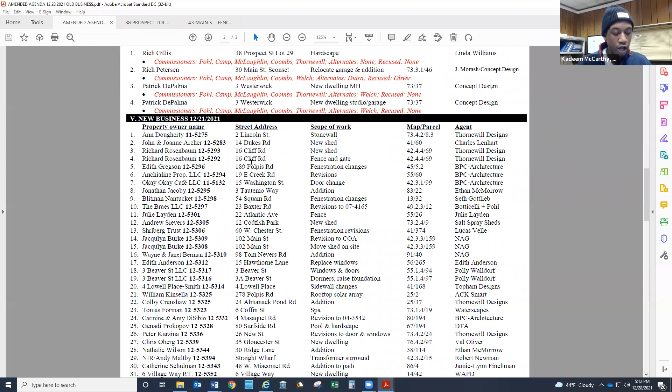Okay, all right, so good, we're going to be holding... go ahead. We're going to be holding number 18 under new business, 12-21-21. That's 3 Beaver Street, windows and doors. Did you say 18? Yeah, number 18, it's 3 Beaver Street, windows and doors.

Esmeralda, could you show us the 18 and 19, please? All right, well listen, so we're scratching the 3 Beaver Street window and door. Correct, so we're scratching that for today. That'll be back in front of us next Tuesday.

How about the dormers? Oh, we're keeping that for today. Keeping that, okay. Okay, and we'll find out where the inconsistency is shortly. Yeah, we'll find out, yep. And then on my number 34, possibly your number 33 or 35, it's 37 Fair Street, roof and fenestration. We're holding that until next Tuesday.

Okay, good, done, and that's everything that I have. Thank you very much. Okay, thanks, Kadeem. Can I have a motion to approve that amended agenda? I make the motion. So moved, that was so moved from Val.

On that motion, Diane, aye. Abby, aye. Val, on your motion, aye. And I'm in favor too. Motion carries. Anybody else joined us yet? I guess it's between holidays, so we're expecting a light turnout, I guess. Nobody else, right? I know Stephen wasn't feeling well, so my guess is he's not going to come.

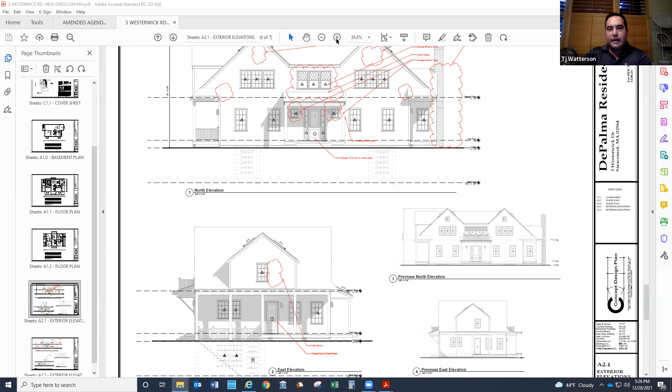On the east elevation, we've got just a fenestration revision, door color change to forest green. And then if we go to the south elevation, which is the rear elevation, we feel that the second floor will be seen, and we did reduce the fenestration on both the first floor and second floor. The previous version had doors all the way across the first floor, so we responded to that by breaking it up a bit, adding more shingle space, and going with some windows. And no changes on the final elevation. And this, by the way, just so everyone remembers, this is the Westerwick in Sconset, the one at the end of the cul-de-sac. Okay, Holly.

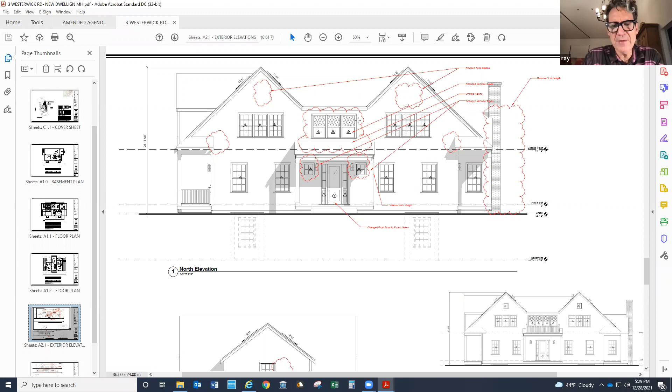Hey Abby, your first comment about the diamond windows, what was that, you know how they're now pronounced as a sort of a diamond over 1? Yes, I think that instead of 6/6, 6/1 might pull this all together, it looks kind of... You just want, totally understand it, you're not suggesting diamond pane windows everywhere, you're suggesting going to 6/1 rather than 6/6. Right, I think it's the style for this. Got it, I totally get it now.

Okay, anything else? No. Okay, thank you. Let's see, our other members on this. I've already crossed it off. Diane? Yeah, I am ready.

I'm not happy with, but agree to the number of rolled windows. I'm sorry Abby, I think the 6/6s are more fitting in this. I think the east elevation needs 2 windows separate up there, or bring the dormer way in. You got enough space up there to put a whole bunch of windows, but I'd like to see them separated, at least keep some of the windows separated in the elevations. So that's all I have.

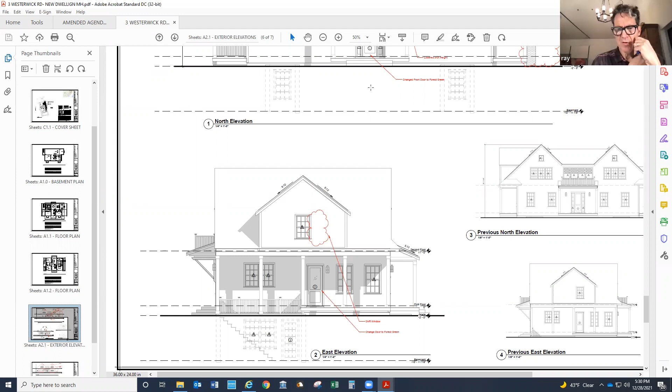Yes, east elevation, that must be the front door, it's more glass than wood, so that's... No, actually that's a side door, John. Show John the front elevation. I can't remember where it was, north. There it is, right there. It's on the north elevation. Yeah, I'm trying to read it, that's all. Two clicks will help.

Let me see, yeah, I agree, somebody mentioned 3 windows over this door with the crossbucks, that's the only thing that hampers the rest of the beauty of the building. And that's an oddball thing, she should remove them and put 6/6s to match the others.

Could I have the east elevation, please? Change the color of the door, okay, but the east elevation is still, that must be the front then, am I right? No. Oh, okay, which elevation is the front? The one you were just looking at. That's the front door.

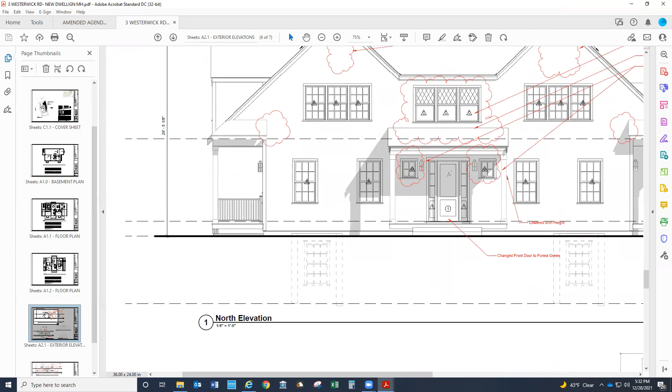Okay, so change, you got too much glass there on the door, and the other windows above it should be made 6/6 instead of 3/, get rid of those crossbucks, they're not typical to have with this house style. Could I have the north elevation, please? That is the north. He changed the front door. You lower that, change the front door. All right, that's what I'm saying. Okay, these 2 things are what I think you ought to do.

Get rid of the crossbucks and make them 6/6s. And I agree with Diane too, too much glass on the back, it's got over 50% glass there. Should we go to the back, please?

Okay, you've got straight up and down, first floor and second floor. You've got 8, 15 lite doors, I guess. Oh, they roll? I don't know. They don't roll, they can't roll. That's my comment there - they ought to change these two things. And plus, 3 doors and not 4 on the south elevation.

My comments are, TJ, why did we get rid of those gable end windows? We just got rid of those because I thought it was making the fenestration too loud, but I could always add those back. I just wanted to.

I actually agree. Without them it would result in a very large expanse of shingle, so I would like to see that. I'm okay with the diamond windows as sort of the accent piece over the front door.

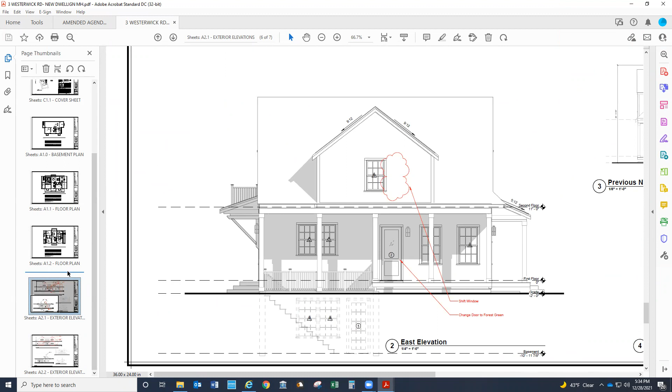Going back to that east elevation with that wide gable, I could make that two windows spaced apart. I'm not sure that two would be enough, honestly - two windows in there? It's a huge dormer. Right, it's a huge dormer, and it also appears like it's sitting right at the eave.

If we go back to the north, I'm sorry to bounce around, but yeah, it's seriously flush right up there - no setback, no nothing. Actually, what you should be doing is setting that back like a foot from the face of the column underneath it. Then maybe the two windows would work, because the dormer would feel less massive sitting right out there at the edge. Yeah, we could do that.

So folks, how would we like to handle this one? I didn't understand what you said - otherwise I'd make a motion. Okay, so if you take the north elevation, you see the dormer that's getting all the scrutiny because it's very large and has one window. You're looking at the side of it on the north elevation, on the left-hand side.

If you push that back a foot, you can just barely make out the sill, that little tiny dot next to the corner board. If you push it back a foot, you would lose a foot of space underneath the window. And then if he added one, so there was a total of two, the dormer would feel less massive and more filled out.

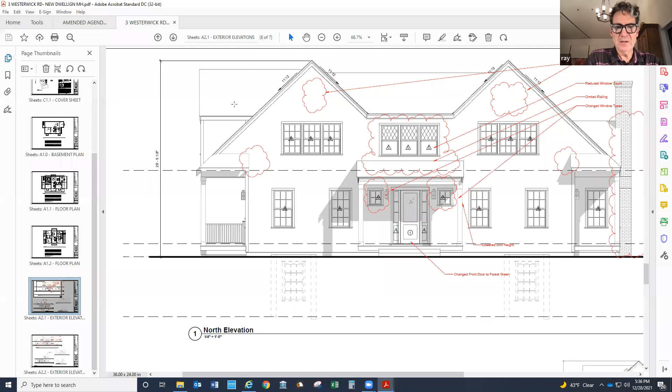But on the east elevation, even if you drop the eave 8 inches - which I think is a good point to Abby's point right now - I'd still like to see, A, two windows, and B, it pushed back a foot.

Okay, I'll make a motion. I'll make a motion to approve with the revisions - is it the east elevation? Yes. Drop the roof height 8 inches on that dormer, the eave, and set back the dormer... one foot, one foot's good, that's our rule. Okay, one foot back, from the face of the column porch underneath it on that east elevation.

Okay, everybody get that? Oh TJ, is that front door glass? I can't tell. Yes it is. Can that go to wood? Because you've got two side lights there. Yeah, that's fine. Can we add that to the motion? Absolutely, Abby? Okay, thank you.

Okay, so there's Abby's motion. Let me make sure I get the board correct. Diane, aye. John, aye. Abby - did I say add another window on that dormer? I don't think I did. I think you did actually. Okay so yes, there's a second window on the east dormer - that was part of the motion. I'm in favor. Okay, very good, and I'm in favor too, so that motion carries.

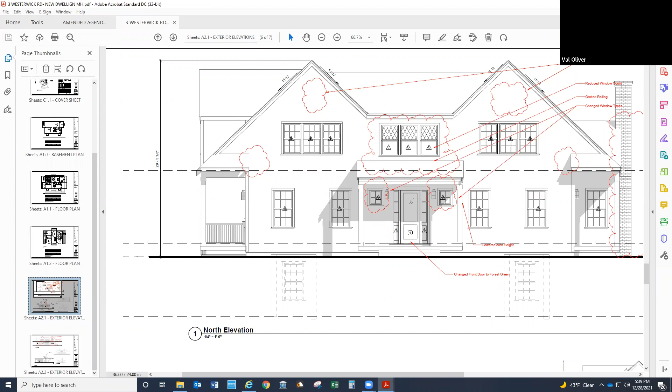I'm not on it, but who's working the screen? Yeah, I know - who's, there we go.

Okay. Did we review this? Yeah, you all have, right.

You lost the cupola, you changed the garage door, and maybe you reduced the height a little bit. Yes, we reduced the height, maybe 8 inches.

All right, Holly, Sconset Advisory. Yes, sir. They appreciate the changes with the removal of the cupola and centering the garage door. They have no further comments. Neither do I. Thank you. Okay, thank you. Who would like to begin?

The only thing I have a problem with is that east elevation with those two windows, the two ganged windows, sort of swimming in that gable. I think it should either be just one and centered up in that gable, maybe smaller, I don't know, but it doesn't look rightly placed. Is that the window pattern odd? Is it going up a stair or something? Yeah, the one on the left is going up a stair. I don't mind that so much, but the ganged one at the top is disconcerting. Other than that, I think they're good changes.

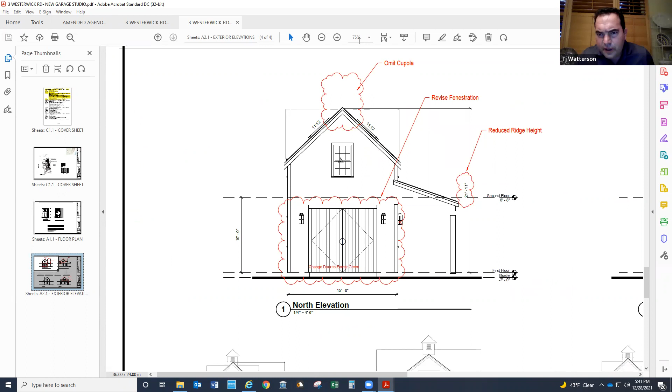Thank you, Abby. Diane? I agree with that window comment. The slab didn't have much change. I was wondering, TJ, what's the height of this building? This one's 21 foot, 11 inches. Okay, that is good.

My original thing was to widen the elevation. I don't know which one it is, all I'm seeing is the little one down the corner. We ran into ground cover issues on adding any more square footage on this, so we couldn't get it wider. It's the left one, bottom left one. But if you've got those problems, I'll go along with what's there, okay.

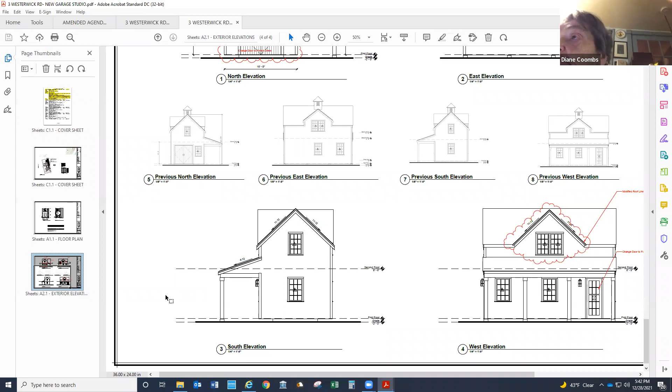Okay, John? West elevation, please. Yeah, you've got to change that door, get rid of that 15-light door and put in a regular house door, a 6-panel or solid core panel, but something, not these. That's the front door of this cottage, it's not typical. I think that ought to be changed.

That's it? No, that's all I got. I still think it's too tall. How tall is it? It looks very vertical. It meets the 1.5 to 1 requirement. It's 21.

Can you change the door and the windows? Oh yeah. How about a 2-panel door there, like the front door of the house? I'm sure John would be fine with that. How about you separate those two windows on the west elevation? Sure. Okay, somebody want to make a motion?

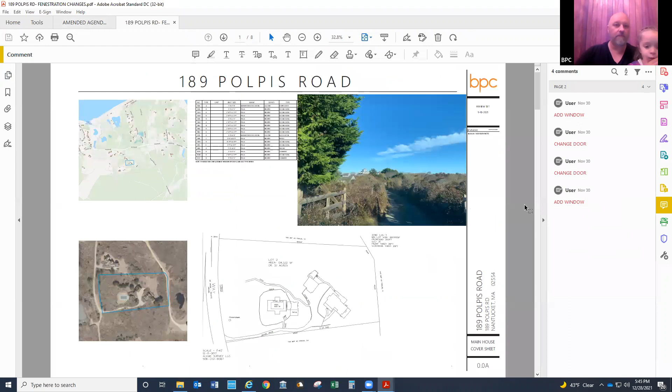Motion carries. Okay, now Joe, are you here for 189 Polpis? Yes. Okay, so you want to go? Yeah, in fact, can you go back to the site plan?

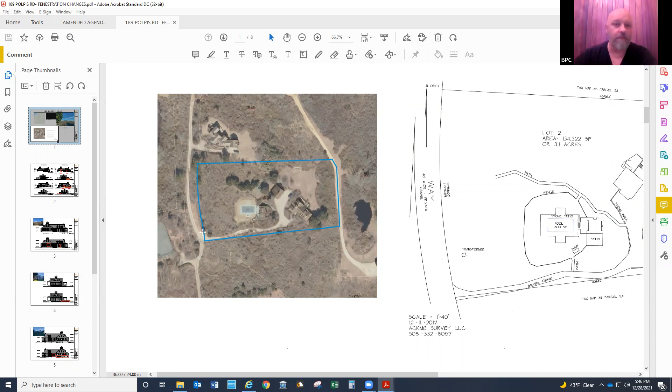This home, we're making some fenestration changes to, and the photograph on the upper right is the visibility from the street. You can see the cupola, but you can't see anything on the ground floor, and this is taken when the vegetation has lost its leaves. The bottom left part of the page shows the site plan. The public road is to the left; the road on the right side of the page is actually a driveway to the neighbor's property. So there's a lack of visibility, not that we're doing anything that needed it, but the next page shows a comparison of the before and after elevations. We are modifying the front door.

Sorry, my daughter's here tonight.

And we are adding a window in between the other windows and a couple fenestrations on the back of the house, but everything in keeping with what's there, and none of it's visible.

So really, those two elevations are the only two you're making any changes to. Correct. Everybody see that on the south elevation, upper right-hand corner? He's changing the door, and adding a window between two approved windows. And then on the north elevation, he's adding a couple of doors under the pergola and a window between the two existing windows.

Where's our house? I'm okay with it. Okay, good. You want to start, Abby? Yep, I'm happy. Okay, so you're good with all that? Little girl drafted this up. I think so, she's going to learn soon. All right, good, good. My kids shunned our business.

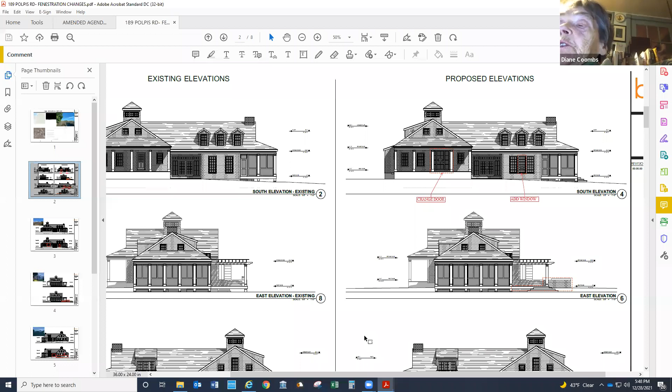I would prefer not to see three windows on the north elevation on the right-hand side. I think it's too heavy. The two windows he had before were good. Same on the south elevation, putting in the three windows - I think the two windows were better. There's a lot of windows out there already. I just think the mulled windows make it heavier.

I think that's all he's changing. Yeah, you can't see any of it. Well, if you can't see any of it, then I'll go with what you got. The proof of that is in the photograph - go back to the photograph on the first sheet, there's your building. Hard to see. You can see the roof, but you can't see anything on the first floor. Yep, so forget it, what I said.

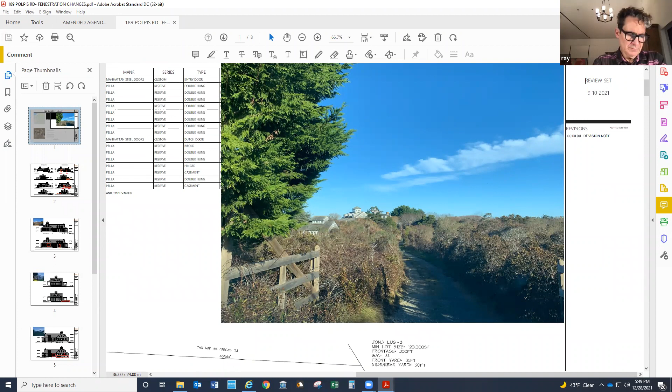Thank you, Val. Based on visibility, I have no concerns. Okay, thank you John. My question is the cupola, that's existing?

Yep, you just saw it in the photo. I would never draw a cupola, never - prior approval, right? Why are there 9/9s and 6/6s and 6-light windows? Why is there a mixture, a conglomeration of all windows, with no familiarity to it? And also on the east elevation - those are all existing, John. I'm just matching what's there, really. I don't necessarily disagree with you, but they're all existing. Okay, no comment, thank you.

I think we have liftoff, guys. Motion to approve is submitted. Thank you, Val. On that motion: Diane, aye. Abby, aye. John, aye. Val, on your motion, aye. And I'm in favor, motion carries. Okay, 19 East Creek, thank you.

I think all of mine will be easy tonight. I thought this one should be consent. Praise Jesus, he's taking off a pergola. I would motion to approve it now. Yeah, seriously? Yeah, well you know what...

This is really just cleanup because it went through Concom and got approved, and Concom asked us to remove the pergola, excuse me, and a couple of warts we had added to the rear of the building to accommodate some mechanical space. You're removing all that because they didn't want any additional ground cover.

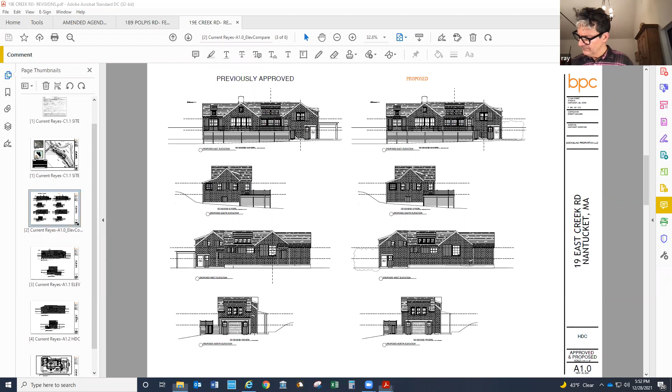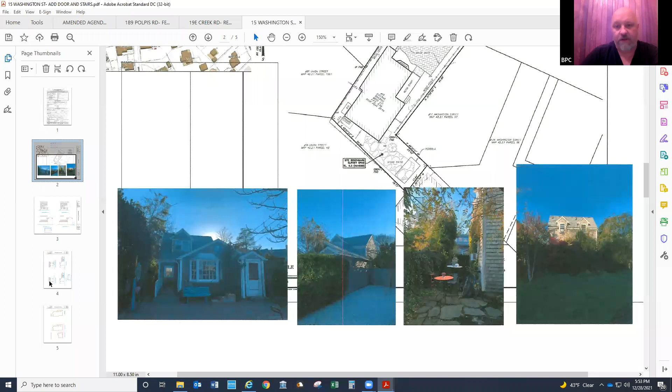Okay, third one is 15 Washington Street. Yeah, it's the Handlebar Cafe. My client just wants to add a door to the rear of the building. If you go back to that first page - these are the four elevations of the Handlebar. The bottom right is the rear of the building taken from the yard at 10 Union Street. My client happens to own both 10 Union and the Handlebar, so that's why I took it from their property, otherwise you'd be looking at this from Union Street down across. And you can see with the site plan, there isn't a lot of room behind the building.

Currently the employees of the cafe come out the side door where the ramp is, walk around the building, and they access some storage there.

So what we're looking to do, and it's represented on the elevations on the next page, there's no changes to the front. If you turn your head, there you go.

Existing elevation is on the left and the proposed is on the right. The door that we're proposing just happens to match the door that's on the east elevation. And we show a friendship stair there, not to make it appear formal, but it just gives you access to either side of the yard if you're coming up from. This is all on the back of the building.

Right next to the hedge. There's actually a 6-foot fence with a hedge in front of it, so you're not going to see any of it.

Let's hear what Holly has to say. Hi, Mr. Chair. HSAB did not take a look at this.

I believe this is a circa 1962 on the NHL within the Old Historic District. And from staff's perspective, as we've all noticed, these are not going to be visible from the public way. But also, that type of friendship stair is obviously an element within our Old Historic District and not out of character with that type of elevation.

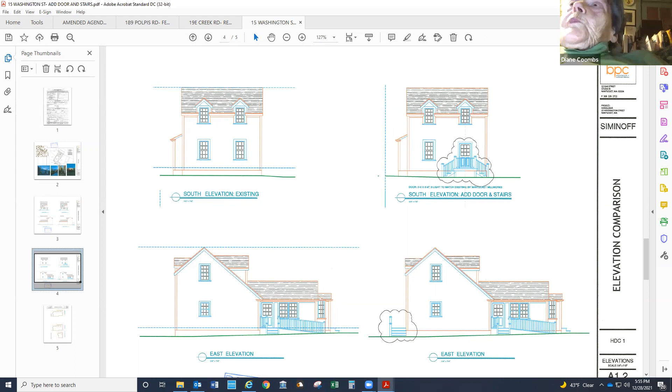I might see you later. All right, perhaps. Where are you? Number 25. Oh yeah, I think. See you down there, stay tuned. We might just get the way we're going, at the rate we're going.

Okay, is anybody here? Is Ethan here? Ethan McMorrow, that would be. Am I hearing? No, Ethan?

I don't see him. Okay, how about, now the last time we had a Squam Road, I don't think Seth represented it, somebody else was trying to get on and we ended the meeting because he called me after, like, what just happened? Wait, so is he on now?

I don't know. Yes, I'm here. Good evening. Yeah, I just saw him. Hello, can you hear me? Oh, this is Seth? Seth Gottlieb, yes. Good evening, Mr. Chair. Hey, hold on one second.

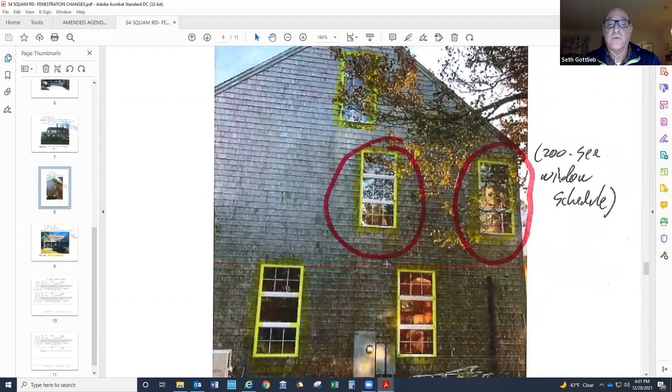Is that it? Well, that's on this side, there's more on those as well. So those that are circled in red are going to be replaced with double hung, the others are going to stay in place. Now, you really can't see this side from the road. The three windows that we're not replacing, we are still going to add trim around them.

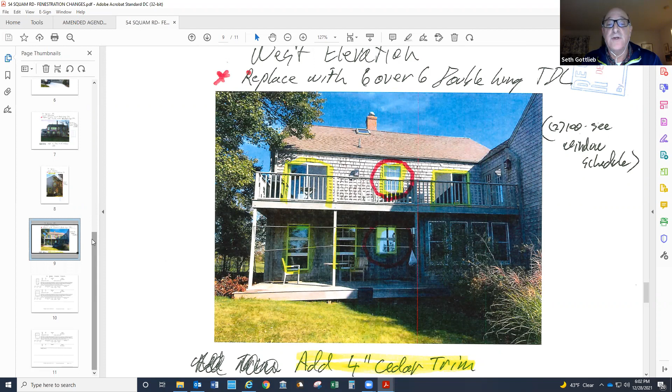Next elevation. Next page. Okay, so that's the back facing the rear of the property, which you don't see at all. Those two windows circled in red are going to be replaced with double hungs, those are going to be 6/6s. And then we are going to be adding trim around those new windows, along with trim around the sliding doors on the second floor, off the second floor deck, and the two windows on the left below. Those four windows on the right, we're not touching, at least not at this time, not with this application.

And I believe that's everything. All right, what do you think, Mr. Chair? I just wanted to give you all the vintage, circa 1970 per the NHL data on the structure.

Okay, thanks. Who wants to start? I will. Motion to approve. Well, since Seth did such a good job presenting, so thoroughly, I think we should deliberate a bit more, but I will take the motion. Can I add one more comment before we go, please? Can I add one more comment, just to make it absolutely clear?

The windows themselves are double pane, with the grills, with the spacers in the grills. At Shepley they refer to them as true divided light, so I don't know if Seth uses that same language. Mr. Chair, there's a motion on the board. Yeah, but I think I just want to make it clear, this is not in the old historic district. I appreciate your saying that, but these windows we're looking at right now are like Andersen windows with snap-in grills. So thanks for telling us that, but there is a motion on the table.

Thank you. Okay, so Val has made a motion to approve. On that motion, Diane. Mr. Chairman, I have not spoken. Yeah, nobody has, because there's a motion to approve this, John.

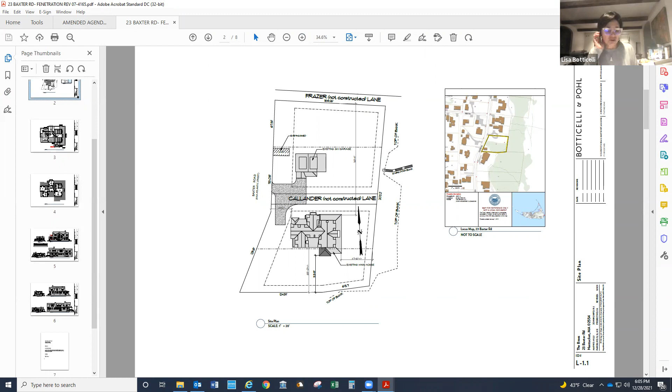Hi guys. Hey Lisa. Hi. This is an application for this house in Sconset where we have approval to enlarge the office. We previously only had 1 window on the east elevation, but we got 2 approved on the west elevation, and the client would like us to do 2 windows on both elevations.

What is all that rattling? Oh sorry, that's me going through my small pieces. So you see the 2 windows there, we do have approval on the west for 2 windows that face the road.

There, so we're just matching them on the opposite side. Very nice. What about Holly? Mr. Chair, Sconset had no concerns on this application, on this contributing structure. Wonderful.

Okay, on the renovation here. Val, I'm fine with these changes. I would motion to approve, but let everybody say something. John: yes, I'd like to see - is this for new construction? No, it's just a change of the windows, John. Oh, there they are, okay.

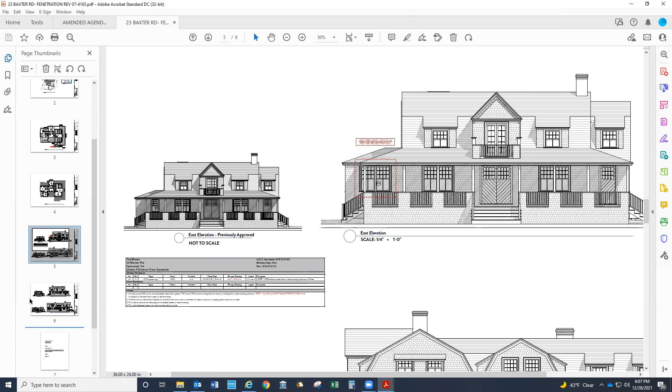Well, it's changing one window to a double? Changing that window from a single to a double. All right, go to the east elevation - we have the west elevation already approved as a double.

All right, I just wanted to know that this is this, okay. All right, thank you, I'll pass on it. Thank you, John. Diane, aye. So Val, you didn't make that a formal motion - yes. Thank you very much. Diane, on that motion, aye. And John, all right, and myself, aye. So thank you, Val, thank you very much.

Okay, thanks, Mr. Chair. Yes. Ethan is back, he just texted me. Oh, okay, let's jump back to that for a second.

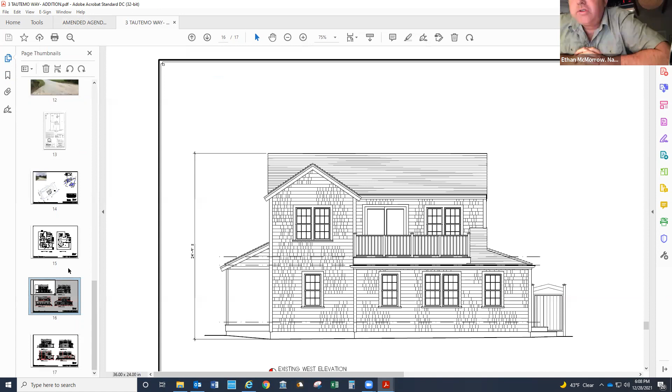Go, Ethan. So that's the house right there. Can you hear me? Yep. It's an upside down house, and they want to make the front a little bit more attractive. So what they're doing is wrapping the existing front porch, and then below they want to wrap the porch around it and add an addition, because the second floor is actually quite small and they want to make it a little bit bigger and wrap the porch.

And basically when you wrap the porch, it hides that deck that's sticking out on the front. If you look at the existing west elevation, wrapping the porch around the house also helps hide that second floor deck to make it more subtle. When you look at the photograph, that's the street view - the house is built backwards, so the front door's in the back of the house. So they want to wrap the porch and kind of soften that look.

Is that it? Well, it also has a new foundation, because right now it's on half crawl space, half a really small basement, and they want to build a proper basement. That's it, and all the other changes are the additions.

Anybody care to begin on this? I wanted to - go ahead, Val. It's funky, but I think it's in keeping with the area and with the house, so I think it's acceptable. Okay, thank you. Abby? Yeah, I was just looking at that west elevation again, where we see the little pop-up balustrade.

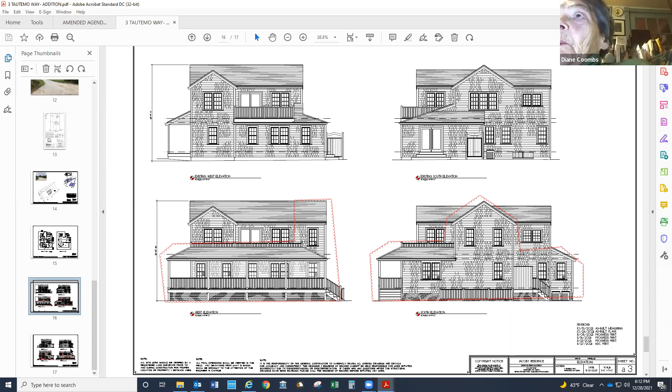I agree with what has been said. I don't mind the porch on the second floor, I think it will fit in there. So it's not very visible, right, Ethan, on Tautemo? Yeah, if you scroll and look at the photograph, scroll up, you can see that's right from the street. The whole house is cedar colored too. So no, I think that will be good. Thank you, okay, sounds like we can motion.

Motion to approve. All right, thanks, Val. On the motion, Abby? I think it's... I'm a nay. Thank you. Okay, Diane? I'm a yay. Okay, John? Aye. Val, on your motion? Aye. And I'm in favor, so that motion carries 4 in favor, 1 opposed.

Thank you. Now I believe we're back to item 11, but like the others, Linda is attending to somebody who's in the hospital at the moment. No Linda, right? Correct. There is no Linda, and I don't believe Julie is here to represent 22 Atlantic Ave either.

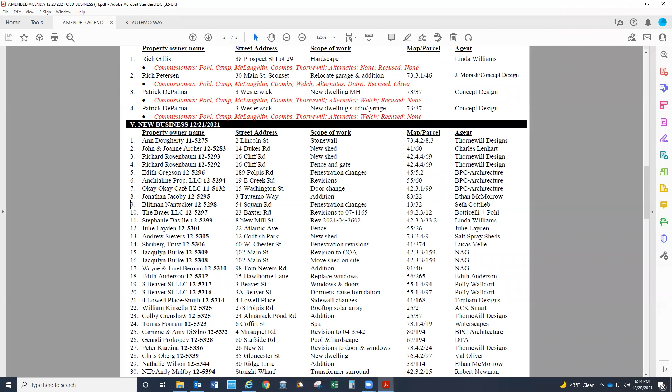Okay, how about the shed in Codfish Park? Salt Spray Sheds. No, I do not see anyone from Salt Spray Sheds either. Mr. Chair, if I may, the one for 8 New Mill Street, really and truly, I was going to actually ask for it to be put on consent.

Let's take a look at it then, it's a simple revision to the door. Holly, that's really good to know. And if there's anything like that, just chime in, because there's no point in having us hold something if we can just push it through. So for 8 New Mill Street, no representation, but Holly says it's just a revision, not a shed. Okay, so let's see what we got.

Did we have HSAB on this? HSAB actually had no concerns on this, this is just clearly a revision. You all remember this garage that was highly confusing in the neighborhood? Yes, you all do. You did have a condition, or not a condition, but you approved the garage doors in a certain configuration. And I believe that instead of having a carriage door that opens, she wants it to roll up. So all the controversial stuff has kind of been removed, like the pent roof over the doors, gone.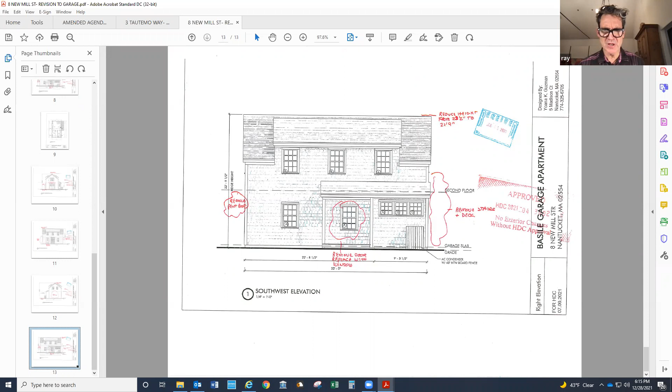No, that was the staff approval. This is just about the door, right? Correct, I read these ahead of time, that's the only reason I know that she used her approval. They're asking for the door, instead of being a swing door, to be overhead, but look the same. Okay, absolutely, that's what they're asking.

Okay, I had a question for you or Holly. It says here that it's 27 feet tall. It's already approved. No, no, it's 22.9 feet tall. I don't see any 27. Oh, it's maybe so small on my screen that it may read as 22.

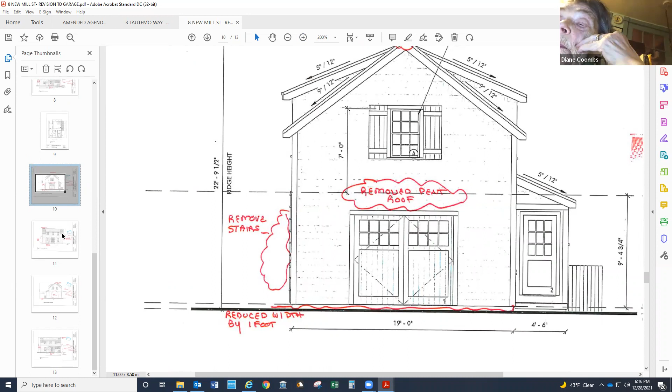That's fine, no, I go with the doors. I thought we had discussed these doors. So we did, but they're now going from swinging doors to overhead doors, that is the extent of the change. Val, did you make a motion or were you just explaining things? I was just explaining it. It is confusing, she probably shouldn't have used this, but that is right.

I would, if everybody's on already. Is everybody on board with this? Disregard all of the red. The only change is to have the garage doors go from swinging doors to overhead doors. That's it, that is the change.

Mr. Chairman, yes sir. Go ahead. I think it's fine, it fits right in the neighborhood, and I'll motion for approval. Okay, sounds good to me, John. On John's motion, Val, aye.

Abby? Diane, aye. Abby, are you there? Yeah, I'm trying to think. I'm thinking as fast as I possibly can through potato chips and Christmas.

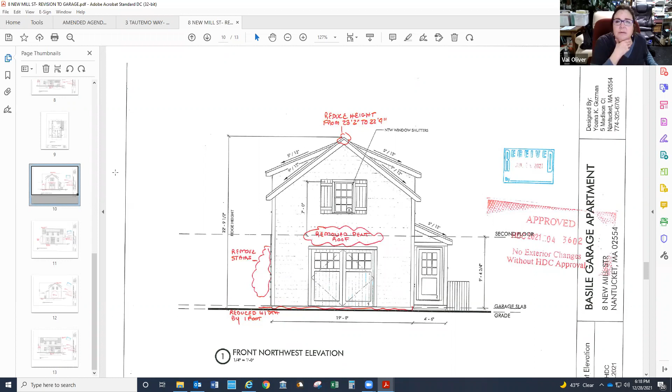Whoever's working that, she did have a picture of the door. Sorry, just remind me of the colors, is it gray or is it natural to weather? Overhead natural wood. Okay, I'm on with it, I'm in. You good? Yes.

Okay, so I've sort of lost track. John made the motion, Val was in, Abby's in, Diane, are you in? I am in, sorry. Okay, John, on your motion, aye. All right, and I'm in favor too, motion carries.

So that's that. Now, earlier we were talking about the fact that Julie Layden is not here to represent for 22 Atlantic, right? Correct, sir. Okay, so we're going to skip that one, right? Now let's just go down here. Let's see, motion to hold then, 22 Atlantic. Right, but I want to see whether we motion to hold several at the same time.

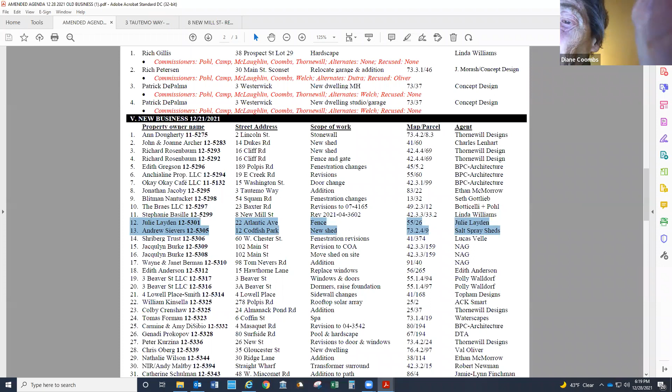Is there anyone here to represent 12 Codfish Park? No. Is there anyone here to represent 60 West Chester Street? I don't see anyone, sir. No, Chip? Yes, right, Chip Webster here for West Chester. 60 West Chester? Yes. Okay, bear with me just for a second, Chip.

Absolutely. Can I have a motion to hold items, I'm not even going to say what numbers they are, 22 Atlantic and 12 Codfish Park. That's what I'm looking to hold. Okay, so Val has made a motion to hold 22 Atlantic and 12 Codfish Park. On that motion, Abby, aye. Thank you. Diane, aye. Thank you. John, 12 and 13 are for hold.

No numbers, I don't know what numbers they are, just on mine it's 22 Atlantic and 12 Codfish Park. 22 Atlantic Ave and 12 Codfish Park hold for representation. Are you in? No, you just got me a little confused here, you jumped around.

Okay, look at the screen, John. I'm looking at it. Okay, you see the things that are in blue? 22 Atlantic Avenue and 12 Codfish Park. Correct, we are hold for representation. Hold for rep, thank you. Now just say yes, you're in favor. Okay, who made the motion? I did. All right, Val, you in favor of your motion? I am, and I am too. That motion carries. Okay, so now we're to 60 Westchester Street, and Chip is representing this, so go.

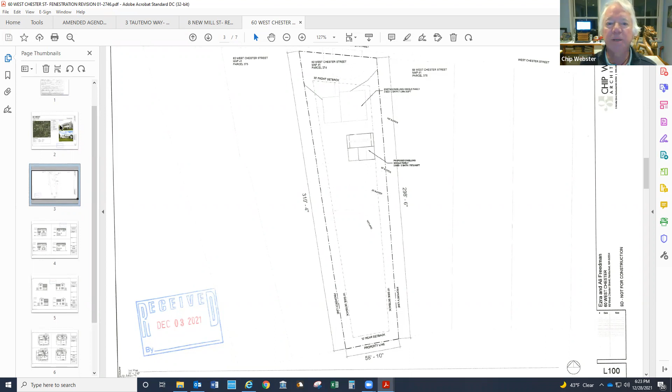So he's just shifting them in this. Yeah, those are only being proposed to shift down, I think about 6 inches or so from their approved location.

But the building is getting taller, correct? No, the building is not getting taller. So why is it bubbled? The site drops off to the rear, and the area it's going is very wet. So when they started into construction, they had to bring it up a little bit to get it out of the water. So that's only in response to site conditions.

It is still lower on the site than the main house. Maybe the photos might help. You're raising the grade, you're not making the building taller. We're not making the building taller, correct. You're not making the architecture taller. Correct, correct.

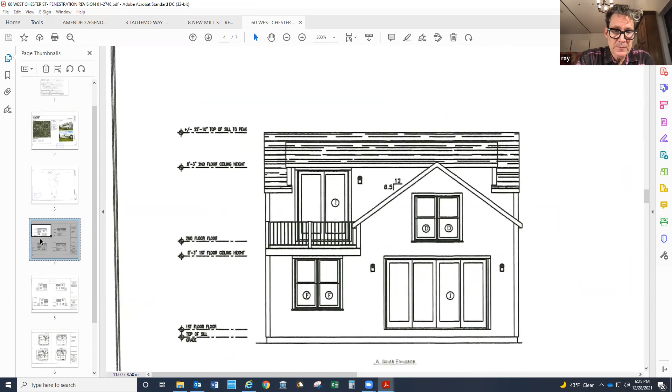How tall is the building now? Looks like 22 to 23 feet, Diane. Okay, thank you.

That was a question they brought up last night, on the back. If it's on the back, it would be better if those were two double hung over the picture window there, but since it's on the way back in the back, it doesn't really matter. So there we go. Thank you, anybody else?

Anyone else want to speak on this application? No? Can we have a motion? Motion to approve as submitted. Okay, thanks. On that motion, Diane, aye.

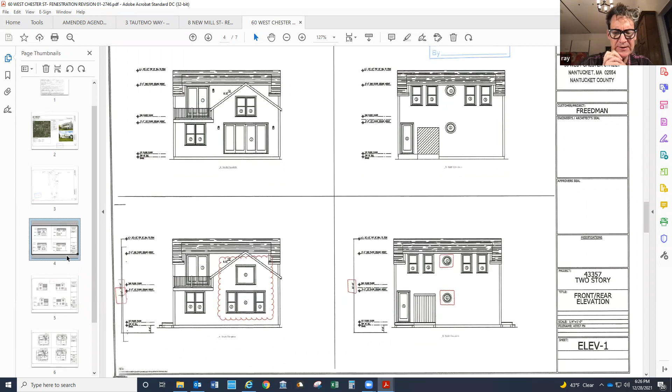Val, aye. John, we have one question. Which elevation is the back? The south, back is the one with the big picture window on it. I can't read it, you can't see it when you blow it out either. South, it's foggy. South, John, that one. Okay, that's all right.

That's fine, thank you. You in favor of the motion? We'll just say yes. Who made the motion again? I forget. Abby. Abby on your motion, aye. And I'm in favor. Did I get everybody?

I'm an aye in case you didn't. I'm an aye. I'm an aye too. All right, thank you all. Okay, so motion carries. All right, so that was that. Thank you, everyone.

Okay, now, is there anybody here, either Bill or Steve, to represent? Yes, Bill's here. Hi, Bill. Hello, Merry Christmas, everyone. Okay, thank you, same to you, Merry Christmas.

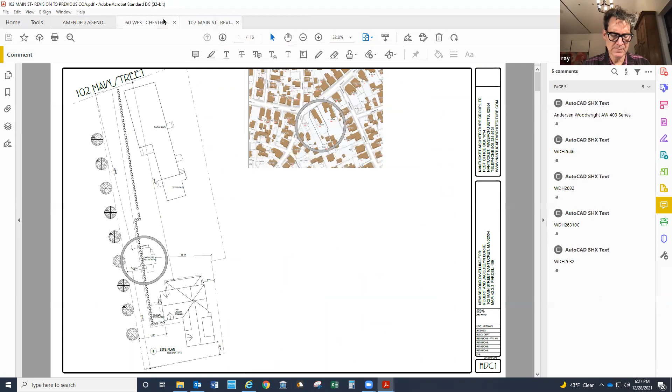Okay, go ahead. Well, this is in two parts. One is moving a shed, which I think is the second one. The first one is a revision to a previous approval. You see which is which here. So the bottom panels are the previous approval and the upper ones are the new proposed.

There's a very large tree on the neighbor's property, so we want to shift the addition 4 feet away from the tree. It's really a huge tree, so we want to put in helical supports for the foundation, to keep the root system of the tree healthy. It's basically taking the existing building and just shifting the addition 4 feet to the right.

Which would be west. That makes sense. I'm having difficulty trying to figure out, I see all these bubbles. Well, the bubbles are a minor change in the position of the chimney. But where is the prior application? The bottom one is the existing, the approval. Oh, I see, that's the previously approved, and we're just taking that and shifting it 4 feet to the west.

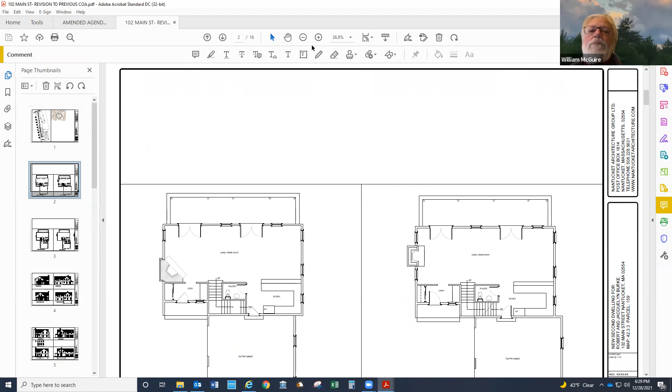I think if you look at the floor plans, it makes clearer sense. Or the site plan, perhaps. See the one on the left, the floor plan, oops, sorry. I just saw it. I think it's the admirable thing to do for the tree. Okay, good. Yeah, it doesn't appear to be substantively different from what we approved earlier.

Anyone else want - so Val, Abby, it sounds like you guys are okay with it? Yeah, I just had a question for Bill.

What changed on the chimney, Bill? Well, the original chimney - if you go to the next set of elevations - the chimney shifted over because the first one was in an awkward position in the main living area. It was sort of a corner chimney, so we've centered it within that room.

Okay, and I see the garage doors have changed too. Yes, the original... I'm sorry, the proposed is actually reusing the existing garage doors. Oh, okay, so the previously approved were different garage doors. That was for a different owner. So the new owner wants to keep the original garage doors, which is on the proposed. Okay, thank you. You're welcome.

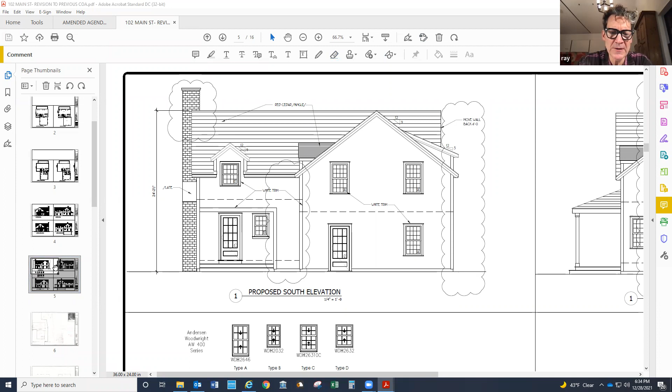Let's assuage John because I know he has concerns about the front door. So John, we're going to show you the site plan here, okay? Thank you, yes, that'll do it. Because then you'll be able to see where all this stuff is. Okay, so you can see there it is - 102 Main Street, and you come all the way down the driveway and into the parking area.

And on the south side of that building, if you keep coming down with the arrow - nope, down. Keep going down the driveway. Not the thing that's circled - that's a mistake too, no, that's the next application. So right there - oop, nope, down.

That's the south elevation - that's where the entry door is from the parking area. The entry door is on the back of the house. All right, Ray, thank you. Just wanted to make sure, okay?

Abby has made a motion to approve as submitted. On that motion: Diane votes aye after some confusion about being muted, Val votes aye, John votes aye, and Diane confirms her vote for the tree.

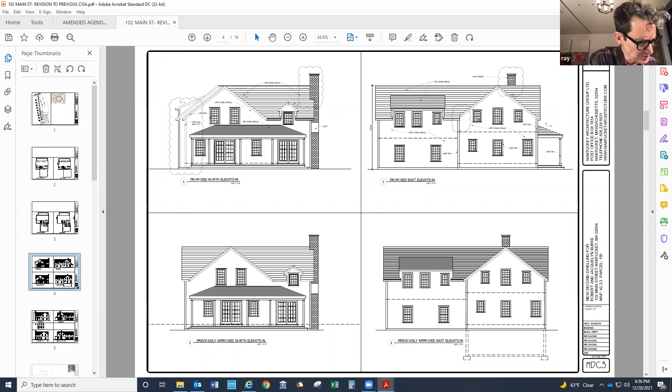That motion carries. Now let's move on to the shed relocation item, which is at the same address.

William explains that the shed is shown on the right-hand side of the site plan. Its current location is just to the left of the new addition, and the plan is to move it 30 feet forward on the lot.

The main house sits closest to the road, with everything else situated behind it, including the shed. They are shifting the existing shed, which is rather charming, further forward so the guest house project in back can proceed.

Holly notes that HSAB had no concerns with the shed move, though it would have been nice to know its age. She's glad it's being retained, since the main dwelling is a late 1800s building constructed for James Bunker within the old historic district, but the shed's age is unknown.

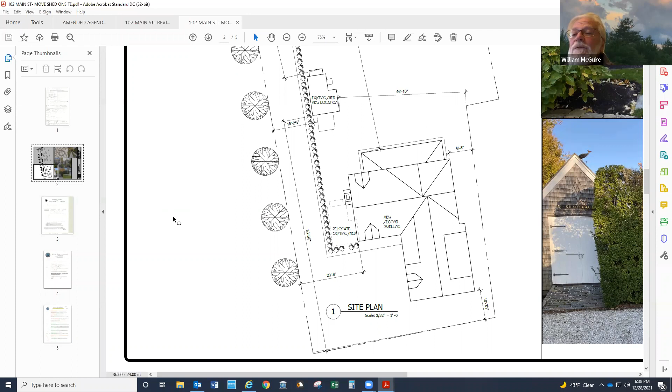The previous clients built that shed back in 2002, so it's from this century, though it has some charm to it.

A motion is made and seconded. Abby moves to approve; on that motion, Diane votes aye, Val votes aye, John votes aye, and Abby confirms she is in favor. The motion carries.

William is having quite a night. Let's see if he completes a hat trick as the board moves on to Bill, who will present 98 Tom Nevers Road, jokingly referred to as Neverland.

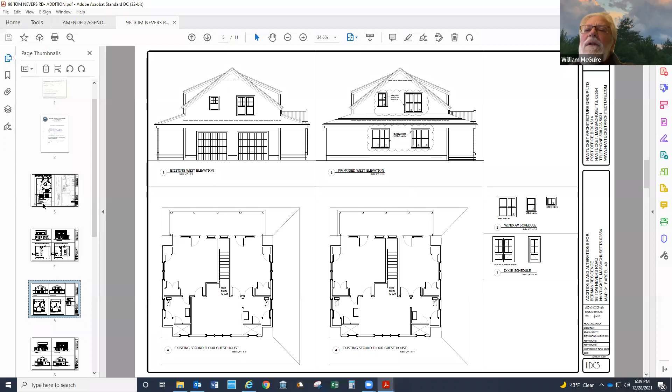Returning to the site plan, the main house is the lower structure and the garage is the focus today. The current driveway is shown on the right-hand side. The owners want to turn the garage doors to face the road instead of the driveway, though vegetation currently blocks visibility of the doors.

That's basically the change. Additionally, the windows are currently 6/1s, but since the main house was approved for 2/2 windows, they want to match with 2/2 windows on the guest house as well.

Within the same window apertures, they want to install 2/2 windows. On the north elevation, the right-hand two windows will become the new garage door location, filling out the existing overhang or porch rather than keeping a porch in front of the garage. A garage door will be visible on that elevation, while all the other windows will change from 6/1s to 2/2s.

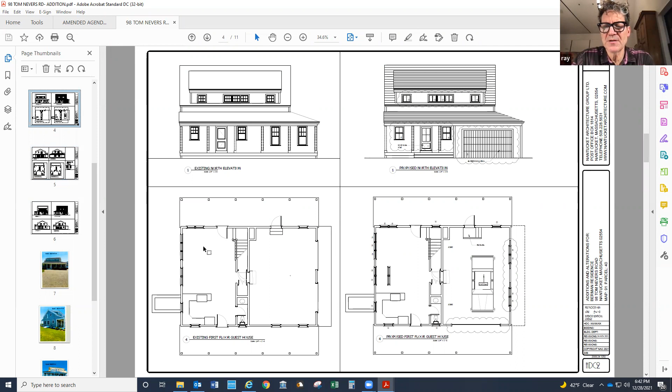It's a big double, like a single aperture. Right, but after I submitted, I realized that it was looking too wide, so we want to just make it look like 2 barn doors. I was gonna say that carriage door we saw earlier would be lovely there, like a series of them.

Yeah, and I have redrawn it, I just didn't resubmit it. But it looks a whole lot better as 2 carriage doors on there, even though it would still be an overhead. Same size, yes, but it looks much better. But again, divided into 4 or 3? Well, no, 2, so it looks like there's 2 garage doors.

Well, the doors, each door would be almost square. Yes, they are still overheads. Yeah, it would still be an overhead door, just the way we're looking at it right now. But it would be rendered as if it was 2 carriage doors, is what Bill's saying. With windows in it?

No. Then what makes a carriage door a carriage door? Like the crossbucks, the crossbuck thing. Can you share your screen and show us? I don't know how to do that.

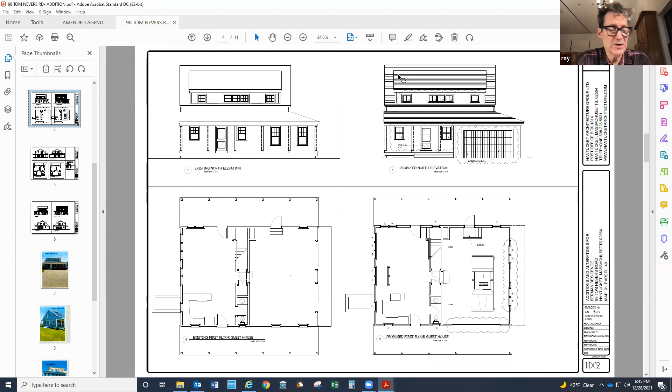Val, aye. Thank you. John, aye. Thank you. Do we have Diane, okay, and Abby on your motion? Aye. And I'm in favor, motion carries. Okay, so Thursday, we'll see you on Thursday, William. All right. Although you will see me later on tonight as well. Oh, okay, very good.

All right, is Edith Anderson with us, or anyone to represent 15 Hawthorne Lane? Mr. Chairman, I do not see anyone here for 15 Hawthorne.

So can I have a motion? Motion to hold for representation. Okay, so that motion was to hold 15 Hawthorne Lane for representation. On that motion, Abby, aye. Diane, John, aye, very good. Diane, aye. Thank you. Val on your motion, aye. And I'm in favor. Okay.

Now, for whatever reason, the first 3 Beaver Street was taken off the agenda. That's correct? Actually, no, it's the second one that should be taken off the agenda. What was that? It's 3A Beaver that should be taken off the agenda. Oh, so we're actually hearing 3 Beaver. Exactly. All right, does everybody get that? Yes. All right, so we're at 3 Beaver.

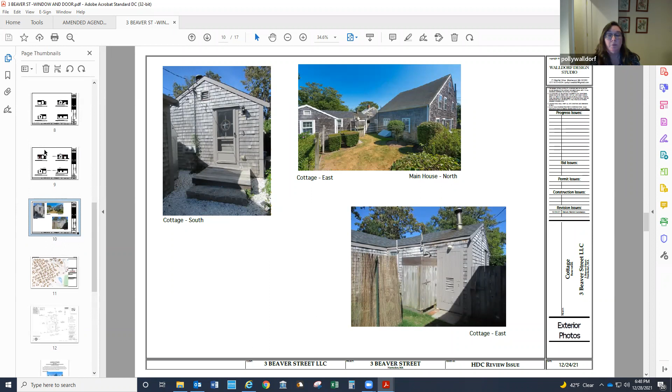And what we're looking at doing back there is we are only removing a window — probably better to see the elevation. So the window you see on cottage east, next to the outdoor shower, is going to be replaced. If you go down to page 9, there you go, with a door leading out there.

And then on the south elevation, we want to add a window to the bedroom there. And that's what we're doing for 3 Beaver, because we're going to have a patio kind of in this L area.

We'll come back with the hardscaping later. How about HSAB?

Mr. Chair, just to give a little context, 3 Beaver has 2 lots now. It was subdivided by the planning board under 4181L. Both are also going through the tax credit application process before the state, so there are two different applications for their rehabilitation projects. The first one is going to be on hold. I have, as staff, provided them some comments, and HSAB has some comments for them as well.

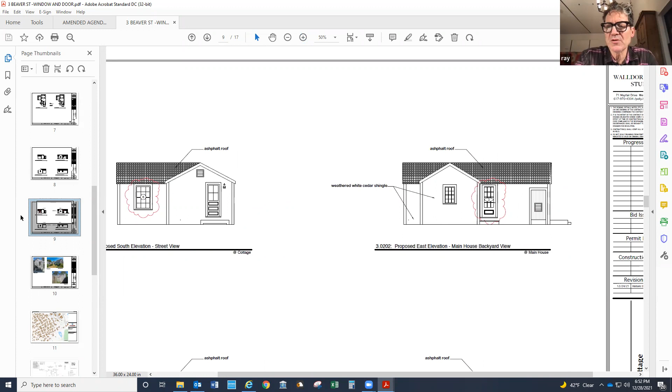And historic structures has said — well, actually, they changed it based on historic structures' comments. Right, east elevation — that's right here, where the 12-light door is. This is living quarters, I believe.

Backyard view — is this visible from anywhere, that door? Let's go back for one moment to the photograph that showed the visibility of this building. John, see the thing that says Cottage South? That's all you can see from Beaver Street. You can't see the rest. I don't think it's visible.

Are you good? Yeah, because this is on Beaver Street, and the next one is Coon Street. No, they don't really get into that. So John, you're okay? Yeah, I'm okay, fine.

Now, who did I miss? I missed somebody. Val, go. I'm good. All right, we can have a motion. Motion to approve. Ah, Val beat you — Diane on Val's motion.

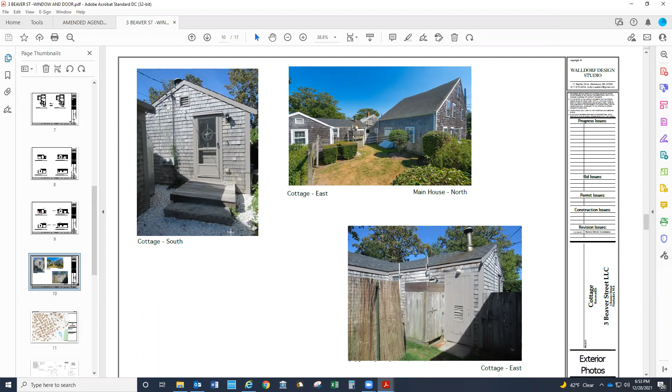Aye. Abby? Aye. Thank you. John? Aye. Very good. Val on your motion, Aye. And I'm in favor.

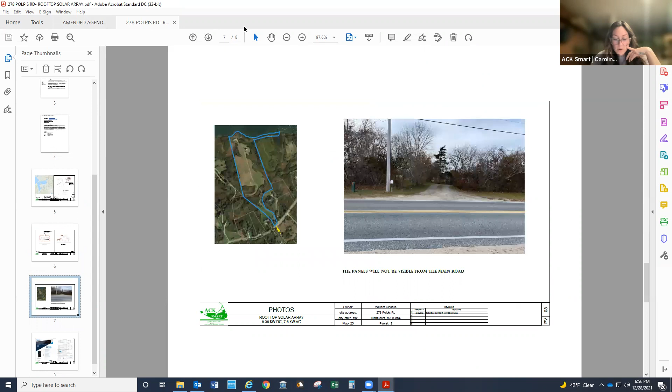Glad to hear it. So I think it's pretty straightforward. We have a solar roof array, all black, and a secondary structure, not visible from a public way. In fact it's about more than a quarter mile from Polpis Road. Wow, okay, pretty far. Let me know if you have any questions.

Oh yeah, this is Kinsella's, right? Yeah, that's correct. Can't see it, you can't see it. I question that. You do?

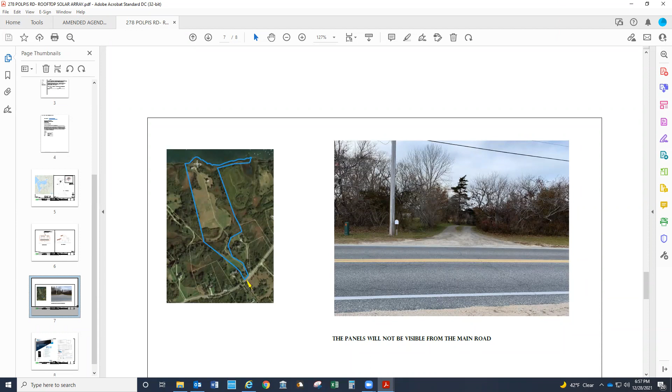Okay there it is, okay John. All right, okay so there's the aerial photo. Now show John the site plan that we just had. There it is. Okay, it's way the heck back there, way back. But you can see it from Medouie Creek. No. I don't think so. I hope not, yeah I don't think so.

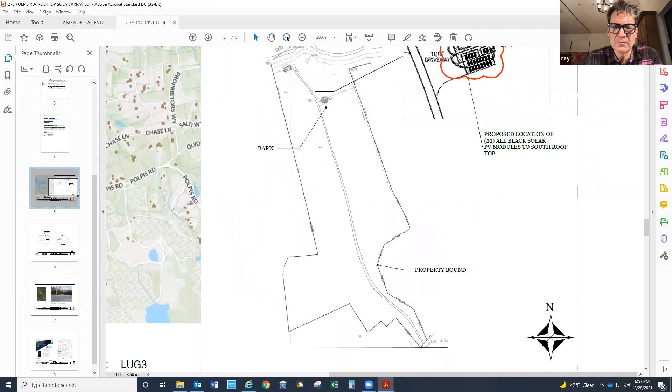There's 22 of them, 22 panels, yes. Are they going on the shed? They're going on the shed and on the dormers. Okay, I find no problem with it. It's in the outside, guys.

It's an all black roof, right Carolyn? It is gray, a gray asphalt. Okay. What I appreciate is it's not the front of the house, it's on shallower pitches and it's way out in the middle of nowhere. So I think it's okay. Thank you Val. It's in the middle of nowhere. Okay, do we have a motion?

Yes, I can make it. Motion to approve. All right, there we go. Abby's made a motion to approve this solar array in the middle of nowhere. On that motion, Diane, aye. Thank you Val, aye. John, aye. Abby on your motion, aye. And I'm in favor too. Motion carries. Thanks a lot. Thank you all, have a great night.

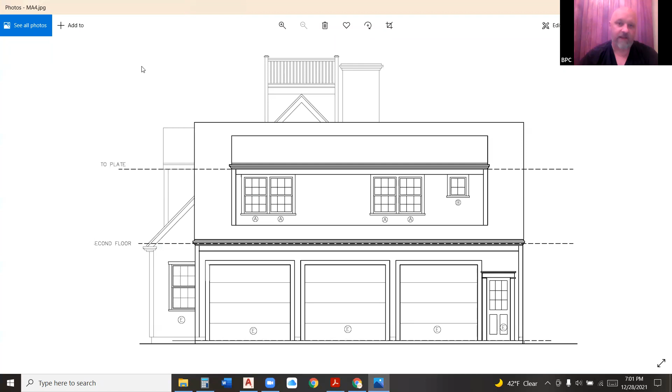Joseph, the difference between yours and this one is the lack of the 4 light window on the right-hand side. Right, so rather than going to get this renewed, we just applied new. I'd point out I think this was originally approved due to lack of visibility, as was the 5 windows that we also got approved previously.

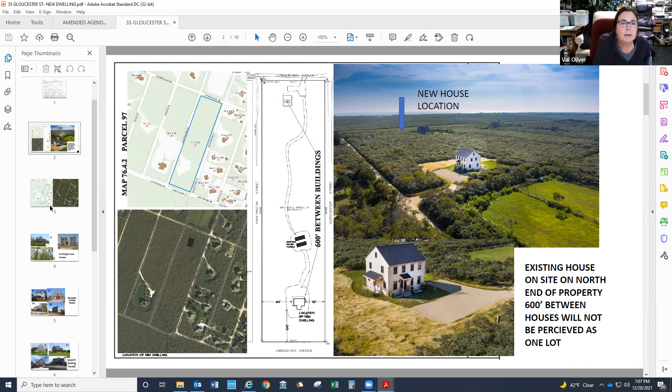And now we're to Chris Oberg, and Val Oliver is going to represent. This is a very large lot out in Tom Nevers. If you look at the aerial map, it's substantial next to the houses across the street, which are all much smaller lots. He has presently a house, which is a Huntington home, 2-story, and a neighbor farther away in the back has a similar house. This is just background information. We're proposing to put a house fairly similar on the other end of the lot, which is 600 feet away. I pointed out the neighbor's house because you're never going to perceive them as the same lot.

These are examples of houses in the area. That's the left and the rear, and there's the front. As you see, it's pretty much almost the same as what he has, a little bit longer, with a porch on the front and an outdoor chimney. Natural weathering, black sash, black roof, black door. It's pretty straightforward.

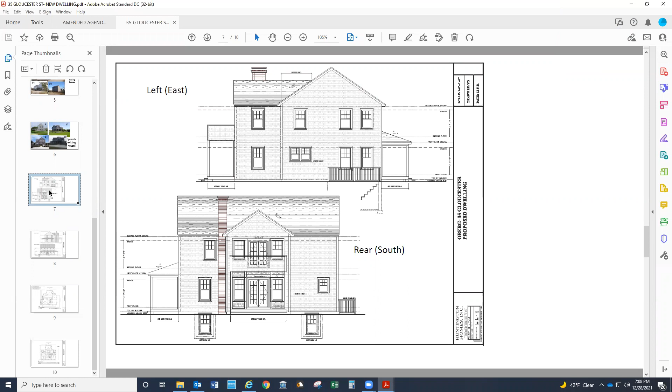Go ahead, John. Could I see the rear elevation, please? You have twin doors, one above the other. I think that should be changed. I think you've got a deck up there, the way it's drawn. Yeah, it's a shingled deck, but they're just showing what's behind it, so you won't perceive it as a door. If it's visible, it looks bad sitting there like that with those side lights, double hung, and these 10-light doors. Could I see the north elevation, please? All right, there's the front door. Could I see the west elevation? That's fine, thank you.

That's it. Abby, I'm fine with it. Diane, okay, aye.

The only thing I'll mention, and this is more of a practical thing than an aesthetic thing, is that second floor deck. You're going to need more shingle. It needs to come down further, which is actually a good thing, just to cover the framing. Even if the deck was at the same level as the finished floor, which it won't be, it's probably going to come down at least a foot. That means those very skinny columns will become a foot shorter, which is all for the good. But that's something in-house you'll need to take care of with those guys. So I'm basically in favor of it.

Does somebody want to make a motion? Motion to approve it. John has made a motion to approve. On that motion: Diane, aye. Abby, aye. Thank you, John, on your motion. Aye, and I'm in favor too. Motion carries.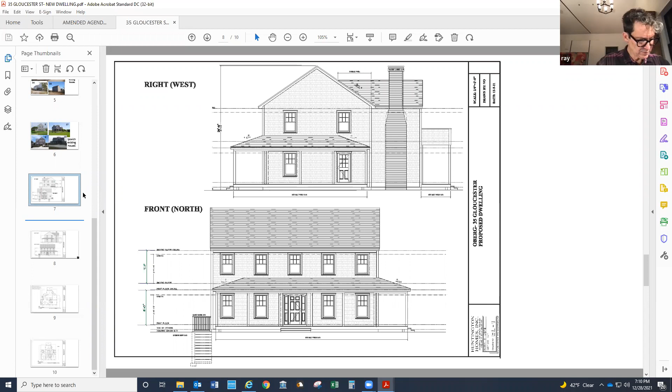Now, do we still have Ethan? Yes. All right, your turn.

So this is Fisher's Landing, I think, right now it's Bo Wilson's house. It's got an existing shingled deck sticking off the side, and they want to take that and turn it into an addition underneath, enclose the top, and add the shed dormer. It's an upside down house. I like that. The deck would actually remain, you're just going to build around it. We're going to expand the bedrooms below and hide the deck, make it look better. Got it. And add a dormer on the back.

Can we see the other two elevations? Just for kicks, there you go. And that's the cut in, right? Uh-huh. Okay, pretty self-explanatory. Who would like to start on this one? I will. Val, go ahead. I think it's an improvement, it looks good, gives it a little bit of attitude. Thanks, Val. Abby? Yeah, a little bit of attitude.

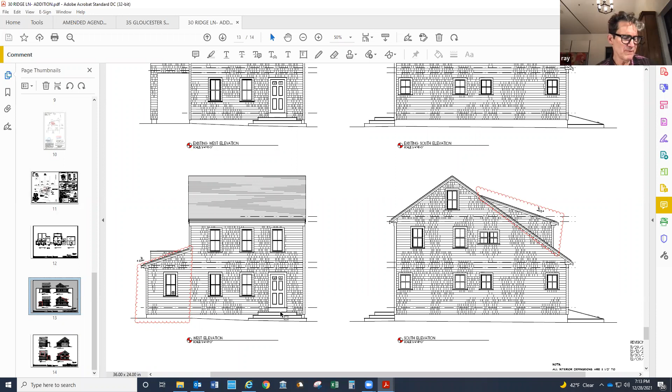Okay, I think we have liftoff on this one. Motion to approve as submitted. Val has made a motion to approve as submitted. On that motion, Diane, aye. Abby, aye. John, aye. Thank you, Val, on your motion. And I'm in favor. Motion carries, very good, thank you.

Did we decide that Robbie Newman was not here? I haven't seen him. Did we see him? No, we did not see him. You held his first application. That's what I thought. Okay, so we'll hold this one too.

Okay, before I do that, how about somebody to represent 48 West Miacomet Road? Anybody? Hi, yes, this is Jamie Lynn, I'm here. Oh, okay, hang on one second then.

What we're gonna do is get a motion to hold the application just before yours. Can I have a motion to hold Robbie Newman's application at Straight Wharf? So moved. On Diane's motion, Abby, aye. Val, aye. John? You know what the motion is? Repeat it, please. The motion is to hold that Straight Wharf application for representation.

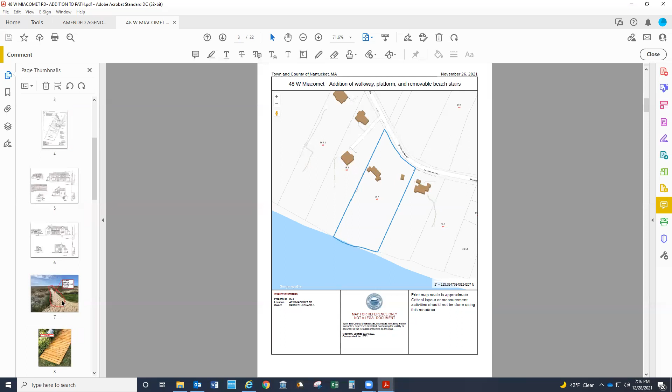Now we are to 48 West Miacomet Road. Let's go. Thank you. Hi, this is Jamie Lynn, I'm representing 48 for our client. We're basically trying to get approved a connection between where their decking ends and the dune there that you can see in the photo. I don't think it's approvable to put anything permanent, but they'd like some sort of seasonal temporary rollout pathway we can place there just for safety - they have a small child. And then below that, they would like to get approved some temporary beach stairs, which I've also included a photo of their neighbor's stairs that they have.

You have to go to ConCom, right? They do. Okay, you're aware of that, right? I'm home with COVID representing this for my coworker. Well, so we can approve this, but the regulatory agency that's going to matter perhaps more than us is ConCom. Okay, perfect.

Motion to approve. Okay, thank you, John. On that motion, Diane, aye. Thank you, Abby - is this temporary? Is that what, Jamie? Well, part of it is and part of it isn't. The rollout boardwalk thing, that's temporary, but the stairs would be permanent. Take a look at this - actually, they would be temporary as well because you're gonna need to do a platform. Some of it has to be permanent or nothing's gonna hold up.

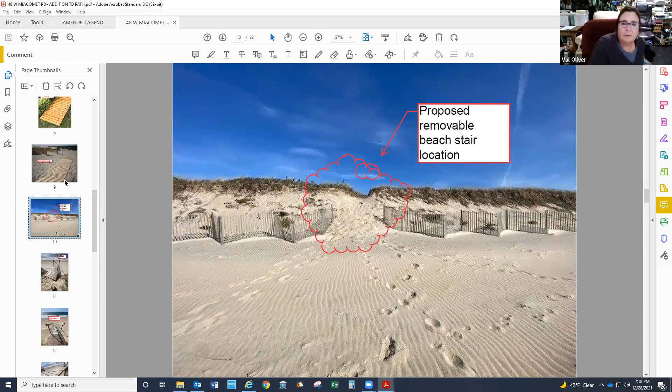Anyway, hopefully that answers the question, Abby. Yeah, but like you said, this has to go through conservation. Definitely. So I think I'll just abstain. Okay, Val on the motion? I do think they're gonna have to come back with a different design of a stair, but with the boardwalk - well, they may. Okay, and John on your motion? Aye. Very good, and I'm in favor, so that motion does carry - four in favor, one abstention.

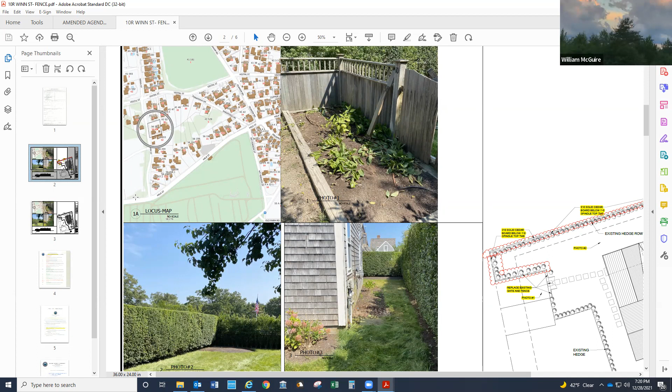Okay, that comes around up until where, on the site plan, that first notation is. So that's in line with the jog where the parking area is. And then from there, we go to a 5-in-1 to match the existing fence that's along the rest of the perimeter of the lot.

Does the board sense? The fence is on the outside of the lot and the vegetation is on the inside. That's the way it would appear. Yes. That's not cool. No, you gotta put the vegetation on the outside and the fence on the inside. Okay, yeah, that's fine too.

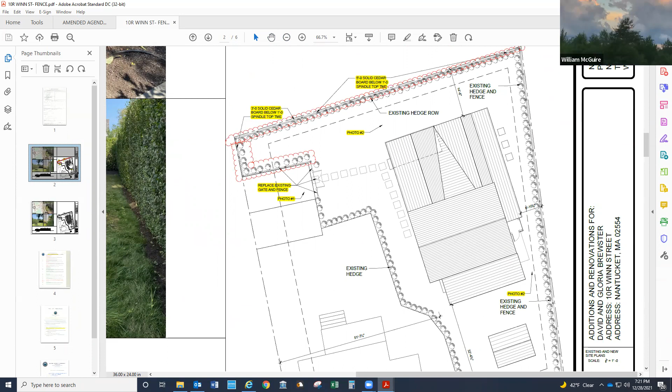But see, the existing fence, there was a fence there, but when they put it in, it wasn't anywhere near the lot line. So with the new addition, they want to push that back to the lot line, so we can do the hedge on the lot line and then put the fence inboard of that. That's our policy, you know. Good neighbors. Yes, exactly.

I have comments. Yes, sir, go ahead. Okay, this is 10 Winn Street for a fence. There's an existing fence there, and I think to add to it wouldn't hurt anything, so I'll make a motion to approve it as submitted.

Well, they're not exactly doing that. That's part of what they're doing, John, but they're adding a new fence, and on the application the fence is on the outside and the vegetation on the inside. We want to flip it around. Okay, so could you adjust your motion to have the vegetation on the outside of the fence instead of the inside? And can the drawings reflect that, like resubmit?

Oh, yeah, that needs to go through staff. John? Aye. No, okay, so you made the motion. I'm wondering if you can adjust your motion so that it passes. The way that you would adjust your motion is to say that the vegetation goes on the outside by the property line and the fence is inside of the vegetation. Is that your motion?

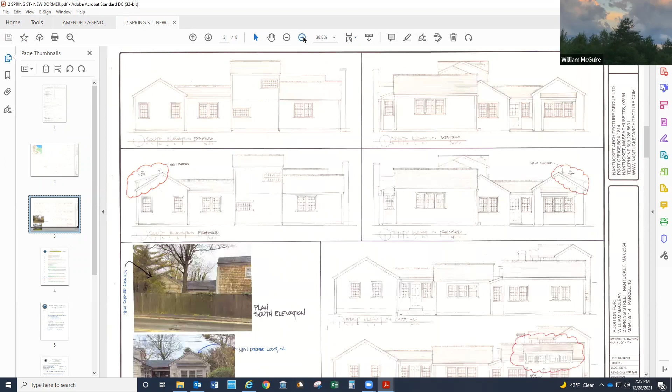William was just waiting for the drawings. So, 2 Spring Street - the top photograph on the lower left is from the street that comes around past the spring up to the stop sign. You can see on that left-hand corner is where the new dormer would be going. The lower photo is the Spring Street side. This is a 2002 addition to the house - these are the old hand drawings, and you can see where the new dormer would be. They're just trying to get more light into the kitchen area.

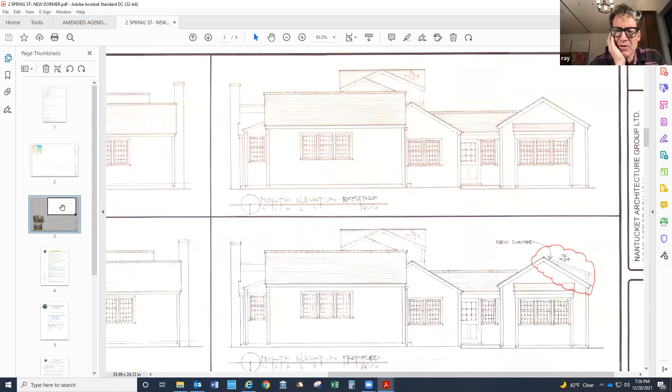So there's the two sides, and here's the front facade - the upper one is existing and the lower one shows little transom-looking things.

Holly notes she doesn't have HSAB comments on this, but will note that this is post-1955 original construction infill within the old historic district.

John says he doesn't think it's visible from the west elevation, thinks it's fine, and makes a motion to approve. On the motion: Diane votes aye, Abby votes aye, Val says ditto, John votes aye on his own motion, and the chair is in favor, so the motion carries.

Thanks, Bill, you're welcome. Thank you, guys, have a good New Year's. I guess I'll see you on Thursday. Okay, sounds good.

So do we have anybody from Emeritus here for 7E? I thought it got put on consent for Thursday. 7E Lincoln is on consent for Thursday, and 37 Fair Street - they requested to hold it until next Tuesday. We got that scratched already. So 7E doesn't need to be looked at since it's being consented on Thursday - that's lovely, that's fabulous.

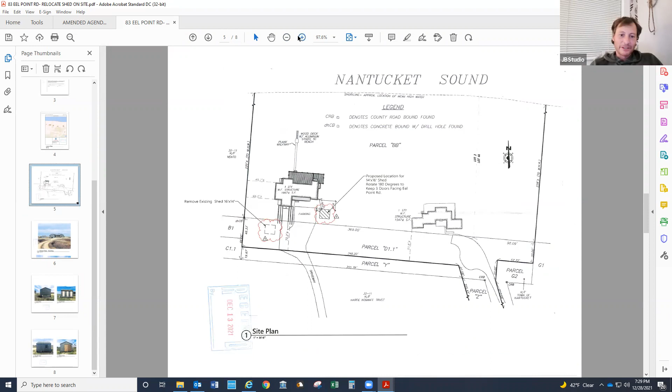So this application is actually the same thing that was approved about 3 or 4 years ago, but it expired, so they resubmitted. They want to move the shed - looking from Eel Point Road at the house, the shed is currently on the left side. They want to put it on the right side and rotate it so the door faces the road. It's the same shed, no change to it - motion to approve as a pre-existing building.

Well, that is true. So you had an approval that expired to do exactly the same thing. Yeah, exactly, nothing changed. Okay, so this is a location renewal, kind of, sort of. John has made a motion to approve this.

Let's go down and see how everybody feels. On John's motion, Diane? Aye. Abby? Yes, aye. Val? Aye. And John, on your motion? Aye. All right, sounds good.

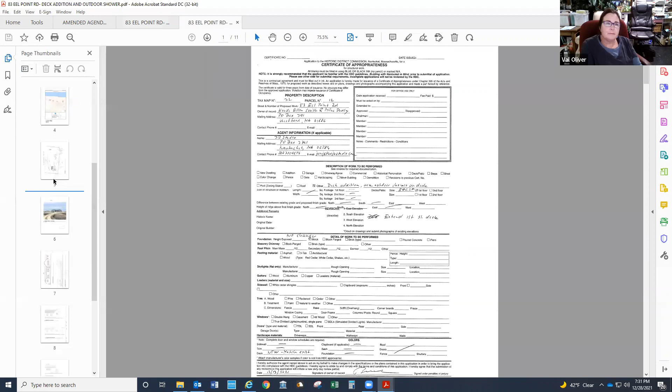One down. Okay, the next one is the same, extend the deck. Same thing, a motion already to approve. Look at this, last page, it's a 3D view. It's beautiful. It was beautiful, and we're reapproving it, right?

Val has made a motion to reapprove this. On that motion, Diane, aye. Abby, aye, thank you. John, aye. And Val, aye, and I'm in favor too. That motion carries. I still think the outdoor shower shouldn't have been on this, but oh well.

They got approved from the road, right? I know, yeah. Okay, so that's all approved. Sadly, we've got nothing else to review.

I do want to put something on an agenda to discuss. I've seen some projects using stained shingles, and I want to know what our stance is on those. I think we need to talk about it because people are using them and telling the lumber yards that we're accepting them.

Well, the sad reality is you cannot get white cedar shingles anymore. I know, but I have a feeling they're not going to change color. It's bizarre. I don't know enough about it to speak in an educated way, but let's definitely, Holly, could we put that on the agenda?